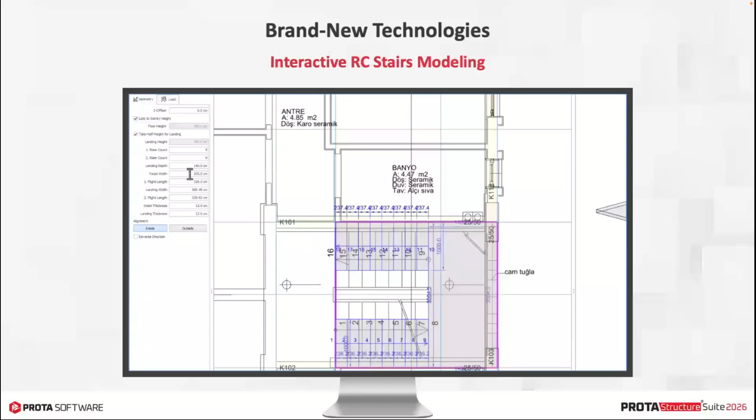And actually, what's really cool about it is how it lets you interactively model reinforced concrete stairs. We are talking about really a smooth integration here, and it will directly integrate into your building model. We even included a whole library of frequently used stair types to make things super easy for you.

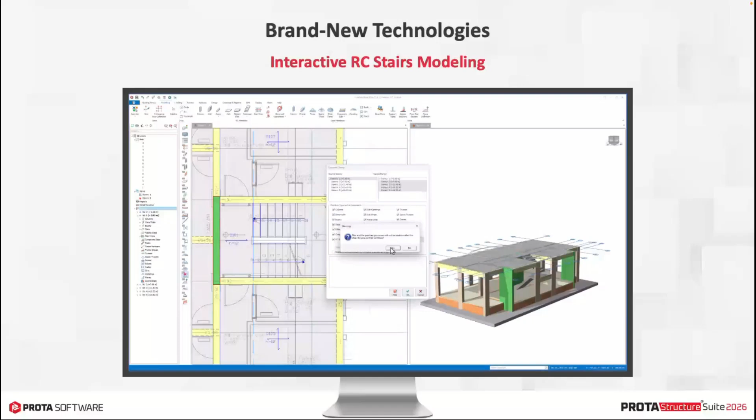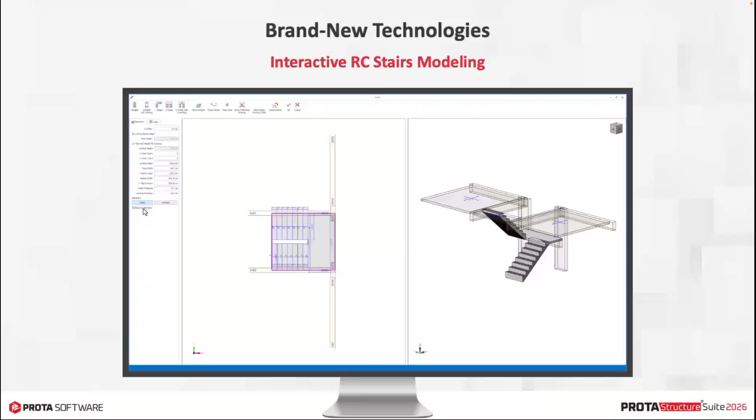Now, when it comes to loads, you can simply apply uniform area loads on the stairs, in any load case you need. And also, the stair module supports 3D reinforcements. You can visualize them, and all detailed drawings are based on 3D reinforcements.

And here's the magic part you see on the screen. The stairs are automatically integrated with your analysis model. They come with a compatible mesh and all the right boundary conditions already set up. So it's pretty much ready to go.

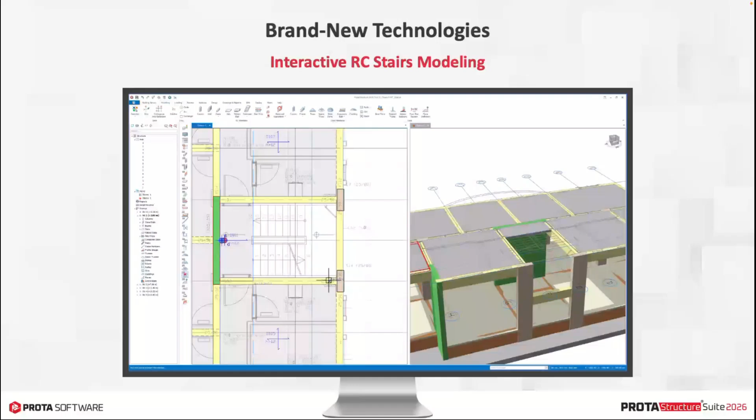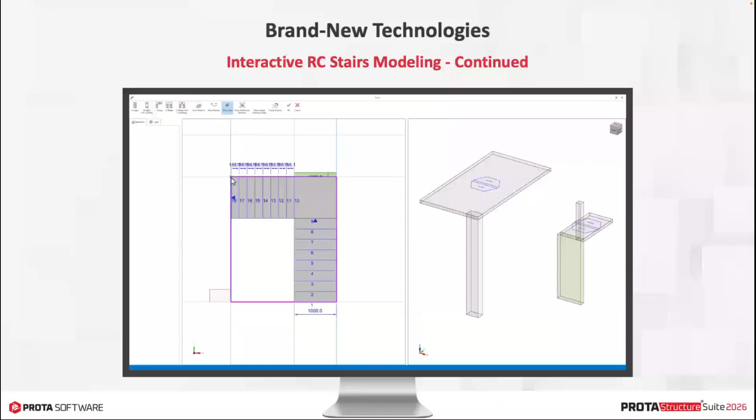And here you see an L-type stair practically modeled. The area is specified by picking consecutive points on the screen. And as an alternative method, the straight stair type is inserted in an area enclosed by axis boundaries. And to connect the slabs, you can apply an offset value. It doesn't have to go from one story level to another.

And that's all. You can fine-tune the placement. You can even use the measure command and measure the height of the stairs, treads, etc. It's very flexible. And another type you see here, the U-shaped stair with two intermediate landings. So all you have to do is pick the points and insert the staircase on the core wall.

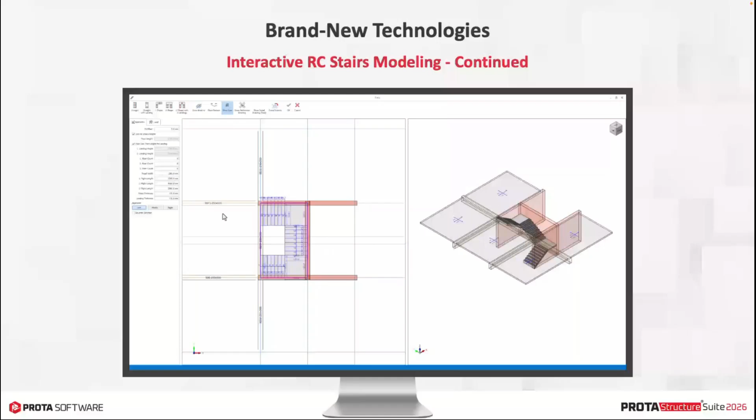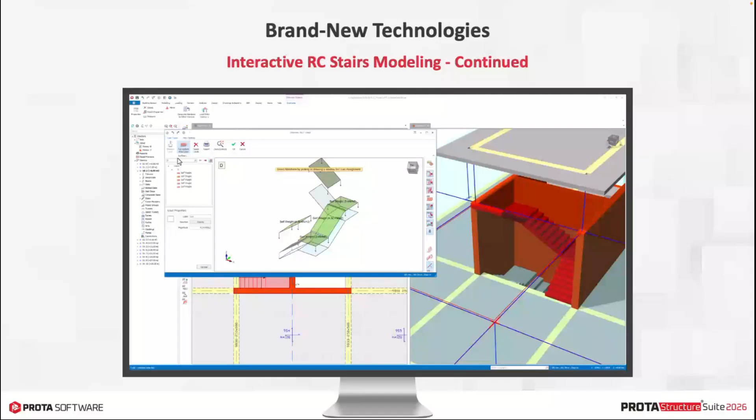And as usual, you can apply the loading on the staircase using the load editor. On top of the self-weight, the additional load, you can insert as many loads as possible. And when you check the analysis model, you can see that the staircase is compatibly meshed with the core wall. That will help you reflect the staircase boundary conditions realistically to the design.

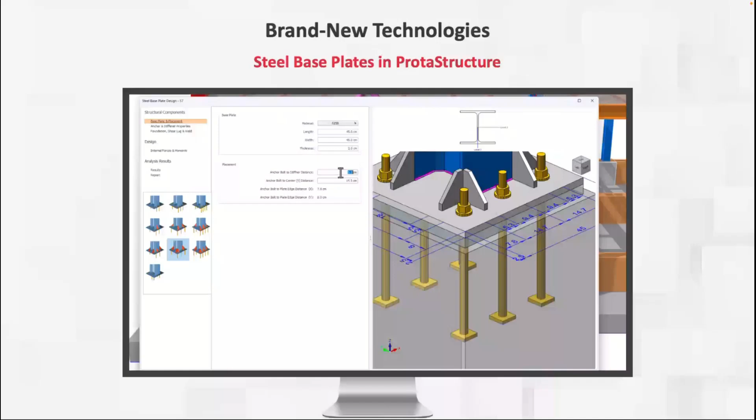And next up, we have been hard at work developing a comprehensive parametric macro specifically for inserting base plates under steel columns. And the best part is you can visualize them instantly in both plan and 3D views. It's pretty cool to see them just pop up into the right place.

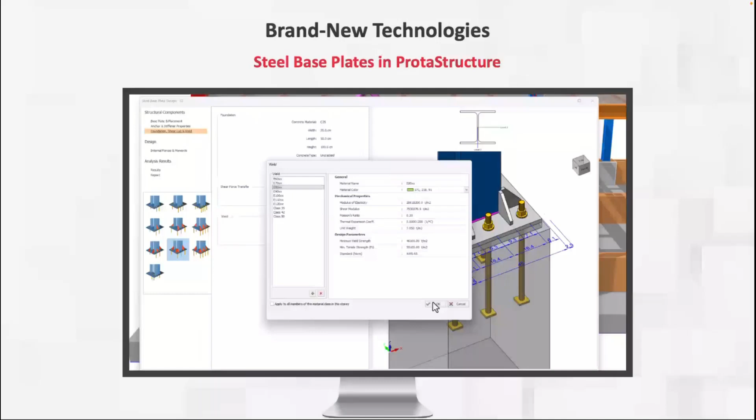Now, we already have some great base plate features in ProtaSteel. We already have a base plate macro, but with ProtaStructure 2026, we are taking it to the next level. We are introducing a brand new base plate modeling and design macro that's completely integrated with ProtaStructure itself. This isn't just an add-on; it's built into the software.

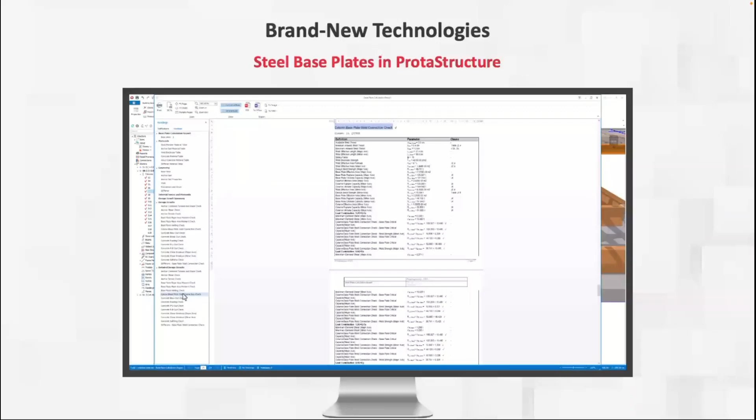And it fully supports the design codes following ACI 318, AISC design guides, Eurocodes, and Turkish codes. And that also includes the anchorage design in the base plates as well.

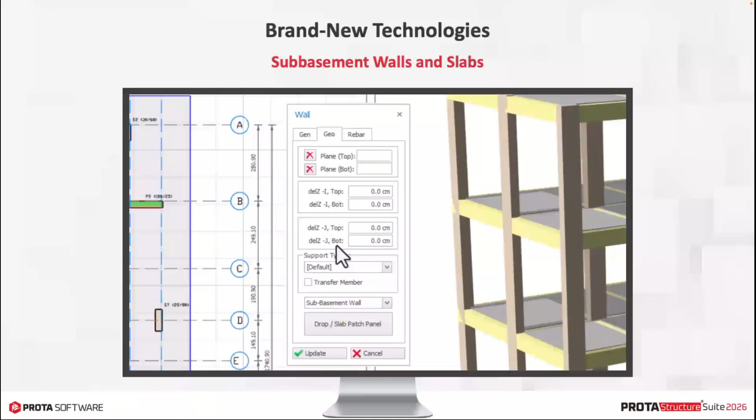And moving on, when we talk about sub-basement walls, these are typically a crucial part of the foundation. They do double duty. They support the infill on the ground story while also containing the fill within the foundation itself. In the past, sub-basement wall modeling could be a bit cumbersome in ProtaStructure, often requiring workarounds like adding extra stories or using deep beams.

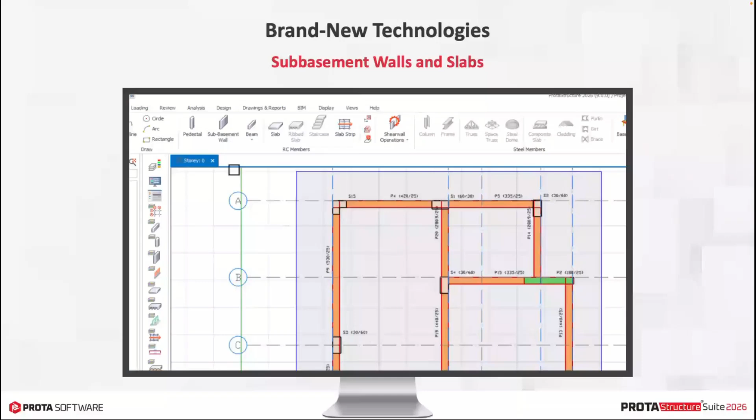But with ProtaStructure 2026, we made this significantly easier. You can now model these directly at the foundation level, first of all. Plus, you have the option to include them in your analysis, giving you more accurate and comprehensive results.

Similarly, sub-basement slabs are also considered as an integral part of the foundation system. These slabs are generally constructed right on top of the fill, which is of course contained by those sub-basement walls. These sub-basement slabs are typically reinforced with mesh reinforcements.

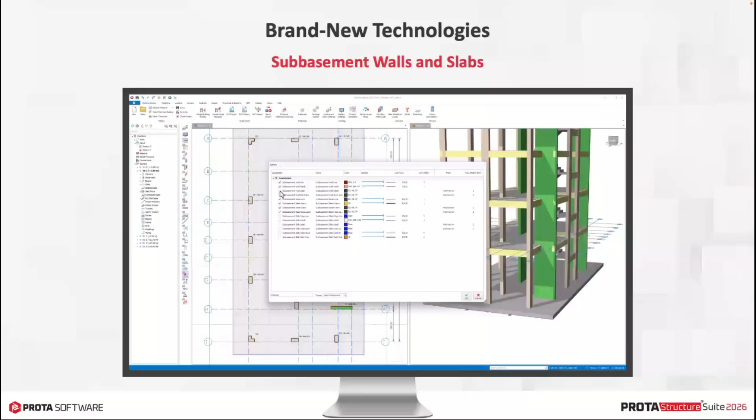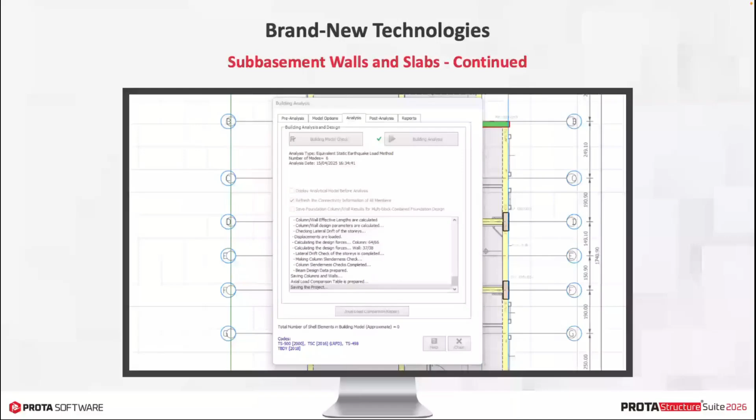Now the exciting news is that ProtaStructure 2026 enables you to model these slabs as a direct part of the foundation system as well. Not only that, but they'll also be meshed compatibly with the neighboring members, ensuring a smooth and accurate analysis. This is a significant leap forward, actually, as it was previously quite challenging to insert and mesh these slabs, especially when they were on the foundation at different elevations. Okay.

Let's shift our focus to another enhancement in ProtaStructure 2026, and it's a powerful new feature that really simplifies the design and analysis of concrete pedestals under steel columns. You can now seamlessly insert these pedestals, define their dimensions effortlessly, and integrate them into your structural models.

Now, here's the smart bit. When you already specified a base plate under your steel column, the base plate design macro will automatically detect the presence of that pedestal. That means you get accurate anchor design and everything stays consistent with your structural requirements. Plus, the column design itself helps you design the longitudinal and the horizontal reinforcement of the pedestals. And this provides you a much smoother workflow.

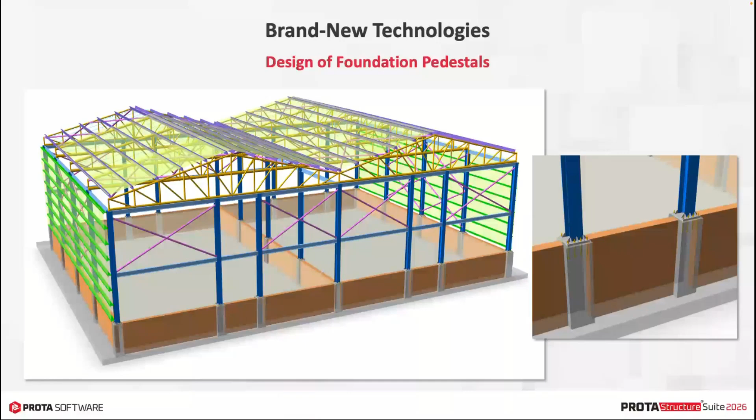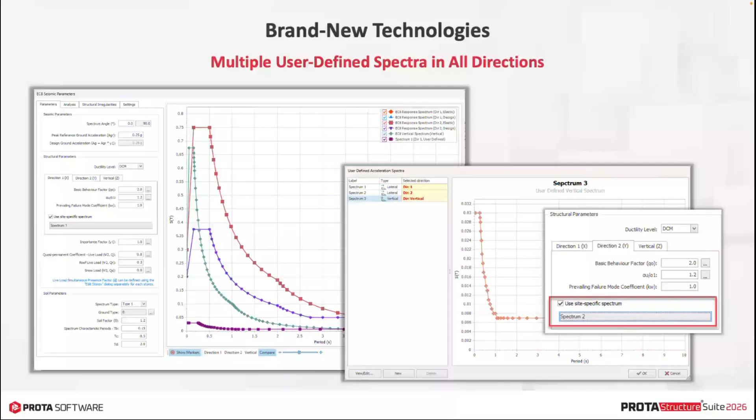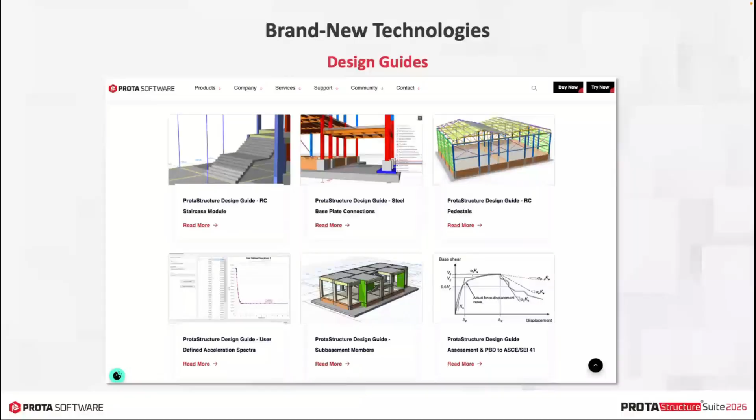Okay, and let's start talking about what we have in terms of code support and design. Let's start by talking about something very powerful that ProtaStructure offers here. That's a unique and robust workflow for the performance assessment and retrofit of buildings. This isn't just basic stuff, to be honest. It is backed by a whole suite of sophisticated analysis. We are talking nonlinear single-mode pushover, multi-mode pushover, and full nonlinear time history analysis. And the best part is it will come with a fully detailed member-by-member assessment report. So you get all the insights you need.

Now, what's really important here is that this entire arsenal of powerful features is now fully compatible with ASCE 41 and Eurocode 8 Part 3 procedures. So for American codes, we have ensured compatibility with key seismic hazard levels, such as BSE-2N, BSE-2E, BSE-1, and so on, different hazard levels with different return periods. And for Eurocodes, you can fine-tune the spectrum and use different assessment methods, such as Q-factor methods and other displacement-based methods. This means you are covered for a really wide range of project requirements and regional standards.

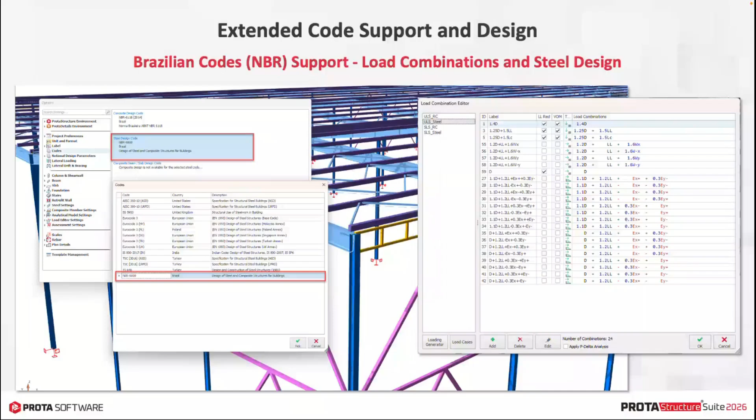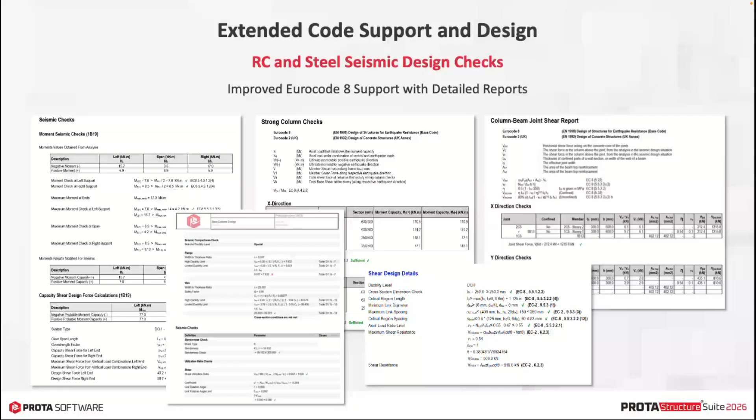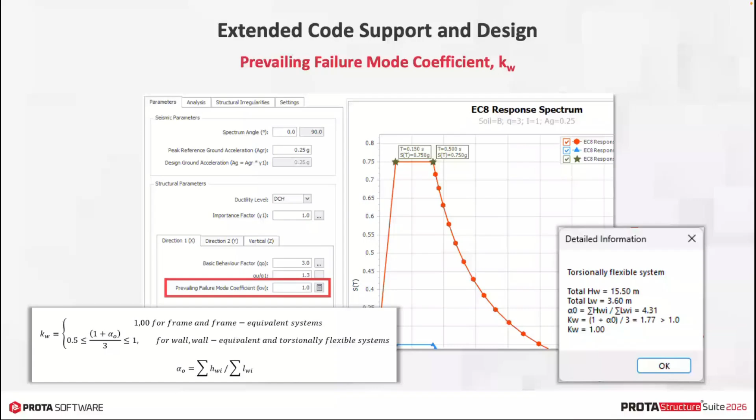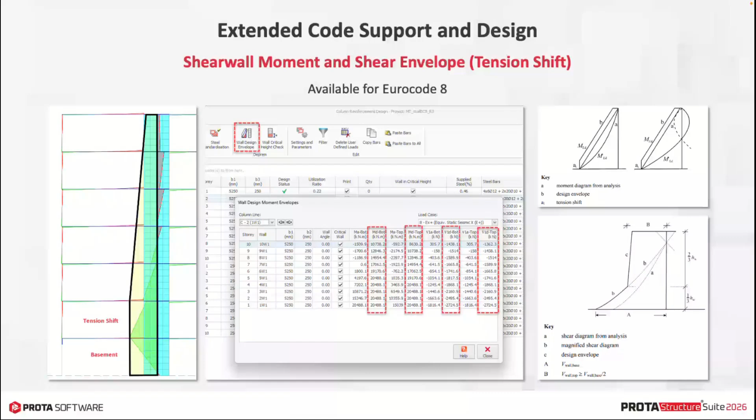Anyway, something else that we have substantially improved in this version is the vertical earthquake spectrum, elastic and design spectrum. This was in fact introduced in the earlier version, ProtaStructure 2025. You may ask, what's the improvement here then? So the improvement here is that you can now customize all the relevant parameters. In the previous version, the vertical spectrum, according to Eurocode, was automatically calculated, but you had limited ability to control it.

But now you can customize all the relevant parameters, things like vertical behavior factor, vertical acceleration, the soil factor, characteristic periods, and these are all independent from the horizontal spectrum. You can just customize it as you want. So this will allow you to adapt your design to the specific national requirements again, because different countries in Europe can adopt different vertical spectrum.

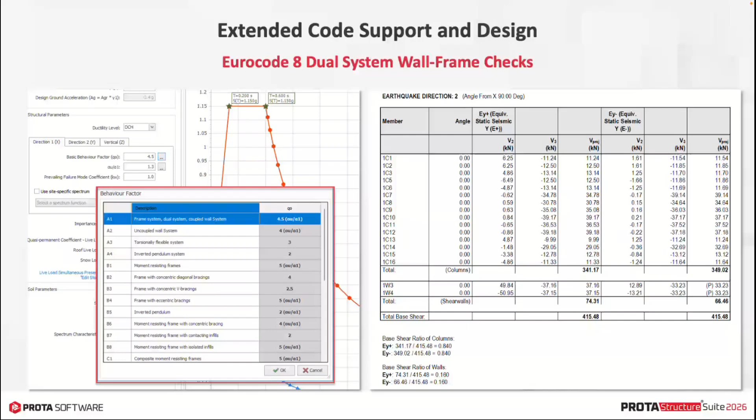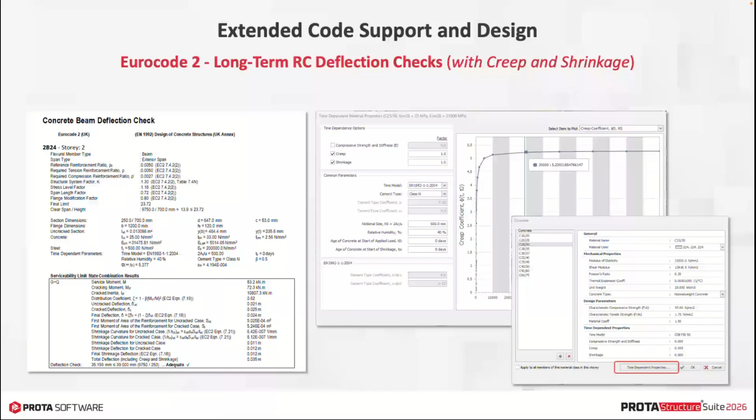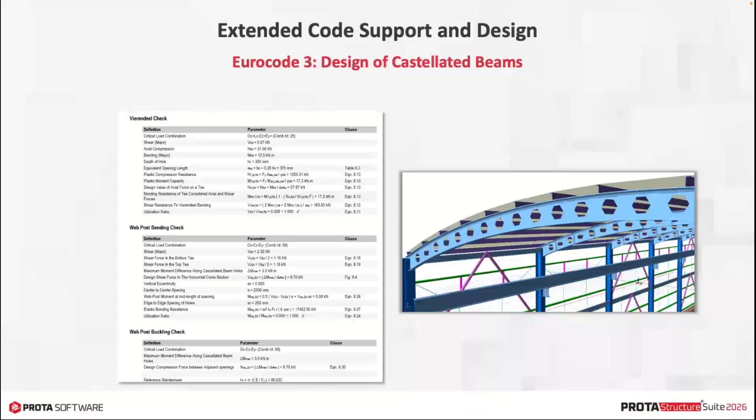Wow, it doesn't finish. Beyond just long-term deflection, we have also significantly expanded our crack width check capabilities. You can now perform these crack width checks according to a wide range of international guidelines, including Eurocodes, ACI, Indian codes, Colombian codes, Philippines, Peru, and Indonesia. This gives you much broader compliance and flexibility, of course.

And we have also added a specific new check that will be very beneficial for our users working with Indian standards. Actually, this was already introduced for ACI code before, but with the new version, in Indian codes clause 34.4, it verifies the load transfer from loaded column to the footing. This can be considered crucial for ensuring the integrity of the foundation. Okay, specific check.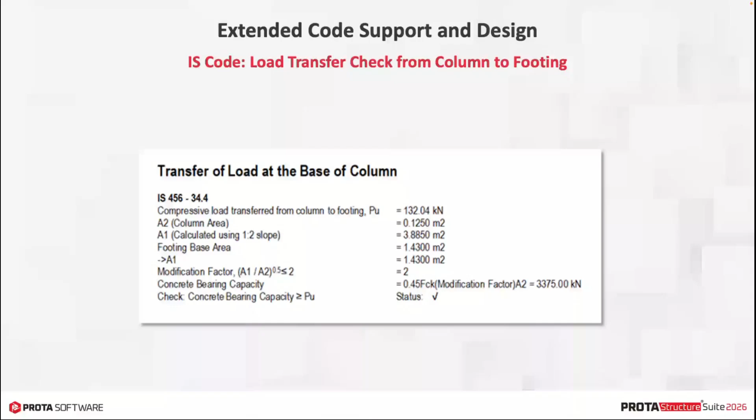Let's also highlight important updates concerning foundation tie beams. These beams, as you know, can be defined in ProtaStructure to provide a crucial horizontal connection between columns at the foundation level. They are, in fact, key for preventing lateral movement and relative displacement, especially when you are dealing with pad footing. And here is the news. With ProtaStructure 2026, you can now design these foundation tie beams according to ACI 318.

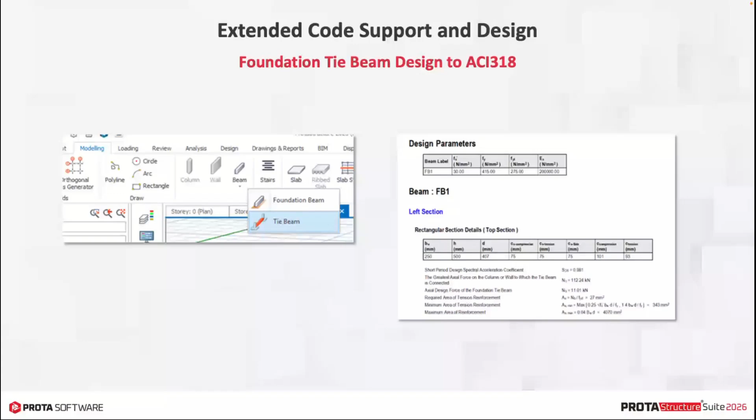Okay, and I'm approaching the end of my presentation. I will hand over to Altuğ, but what about the enhancements in analysis and analysis model creation? So let's start with punching shear checks. With the new version, you now have the ability to perform the punching checks directly using the finite element results, specifically leveraging the out-of-plane shear stress values.

What's really smart about this is that ProtaStructure will automatically collect the most critical shear stress values around the punching perimeters, and then it will compare this directly with the punching capacity. These checks are thoroughly done according to both ACI and Indian standards, ensuring comprehensive code compliance. By the way, we are not doing this for Eurocode and BS at the moment. Eurocode and BS are still using the analytical approach.

We have also added some important flexibility to help you strike that perfect balance between automation and control. So with the new version, we now support user-defined entries for accidental eccentricity and seismic overturning safety factors. This enhancement will directly empower you to tailor your design with greater precision to your local requirements, and it will give you an extra layer of control. All right.

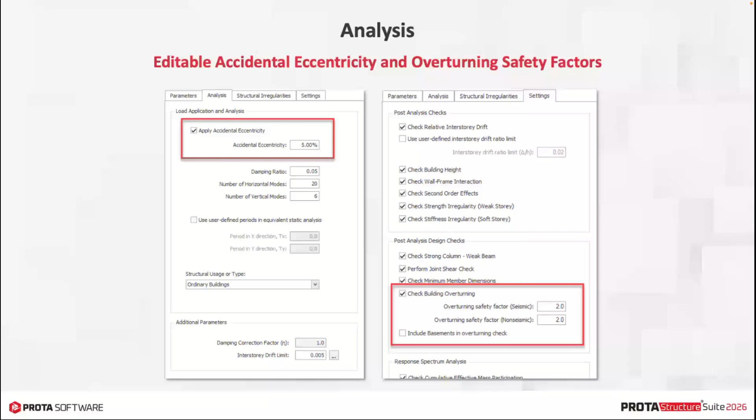Here is a really flexible new feature in ProtaStructure 2026. You can now designate any story as an intermediate story. So what's the importance of this? Intermediate stories can be quite diverse in practice. They could be partial installations between two main stories, perhaps specific structural members, or even internal setbacks used for various purposes in a building. If these elements are defined on what would typically be a standard story, ProtaStructure now allows you to explicitly designate that story as an intermediate story.

The key benefit here is that the intermediate story will be excluded from the irregularity check, which is often what you want for this type of level. Crucially, though, the system will still consider its full stiffness, mass, and load in the overall building analysis. They will not get lost, but you will get accurate results without unwanted irregularity flags. This, of course, provides you flexibility again while you are dealing with complex architectural and structural layouts.

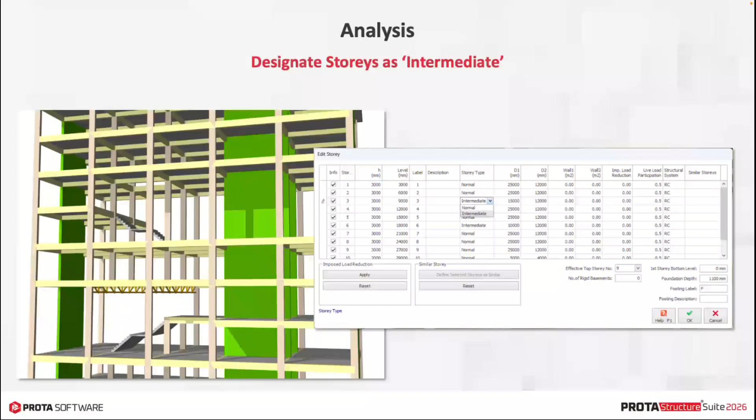Okay, and here is another really significant enhancement for your finite element analysis in ProtaStructure. You can now model and mesh multiple slabs positioned on top of each other within the same story. So this is a long sentence.

Okay, this improvement is genuinely about allowing you to address much more complex structural configurations. In earlier versions, only one slab in the same story was typically included in the mesh, which could limit the accuracy of your analysis for intricate designs. Now you have that full flexibility for complex architectural and structural layouts. You can model the slabs positioned on top of each other within the same story.

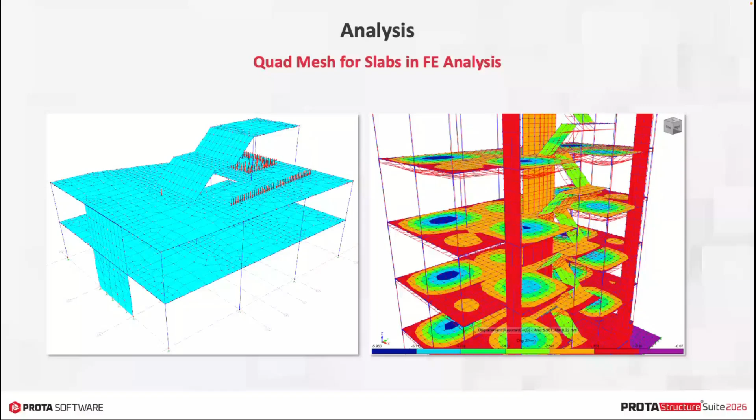And we've got another notable update to our meshing capabilities. We are now introducing quadrilateral shell elements for slabs. The great thing is that the mesh density for these is automatically adjusted by ProtaStructure, taking into account the minimum mesh size you specify. And from now on, the default shell element type in ProtaStructure will actually be the quad members. However, our smart meshing algorithm will automatically revert to triangular elements whenever the geometry of your structure truly demands it. In those cases, you will see a clever mix of triangular and quadrilateral elements used to ensure optimal meshing.

As you know, we are continuously improving our seismic analysis and design capabilities because there is no end to it. The engineer's requirement to design against seismic loads is quite challenging, and ProtaStructure does a very good job, in my opinion, and we are continually improving this in each version. So now we are bringing a new option: shear wall stiffness modifiers applied only in critical stories.

So as you know, ProtaStructure allows you to use cracked section properties for the seismic analysis. But specifically for the walls in this version, you can now allow ProtaStructure to use the cracked section properties only in the critical stories. That is a detailed but very effective option for seismic design.

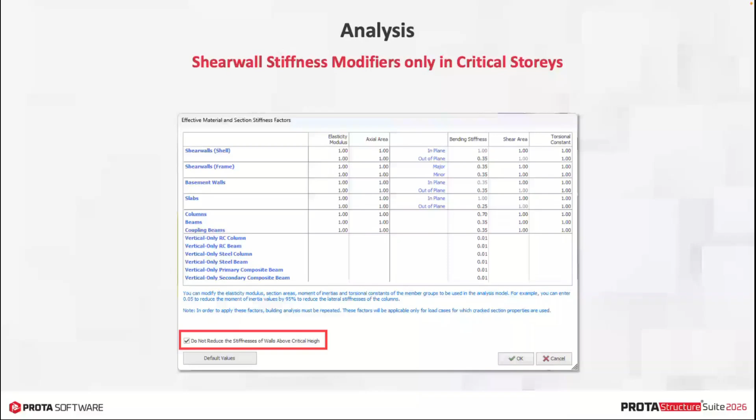We have taken another pretty significant step in the new version when it comes to load calculation and combination capabilities. We know ProtaStructure already supports the calculation of dynamic soil thrust and snow drift loads. However, in previous versions, you typically needed to manually create the user-defined load case and actually assign these specific loads.

With this latest version, the difference is ProtaStructure now can automatically generate the soil dynamic load cases and the snow drift load cases. And these load cases are seamlessly integrated in the combination group with the appropriate factors, and they are automatically included in the analysis. But we have to note that while the load cases are created automatically now, you will still need to manually assign the calculated loads to these automatically generated cases.

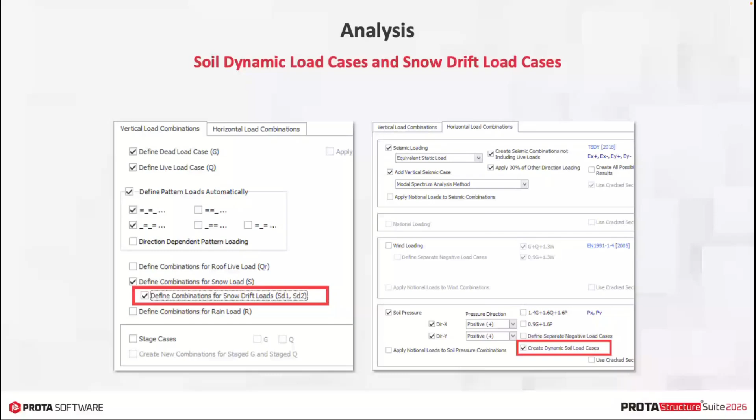All right, another significant refinement to our finite element modeling, particularly for flat slabs and raft foundations. ProtaStructure has a well-established feature that automatically crops the column outlines from the finite element slab mesh. This is super important because it leads to more realistic and economical designs by eliminating those unrealistic peak stress values that can occur when a column connects to a slab at just a single point.

And now in the new version, we introduced a brand new feature, automated body constraints. This enhancement automatically defines constraints between column joints and adjacent slab mesh points. What this does is it more accurately simulates the actual effects of the column section on the slab mesh.

The body constraints ensure that the joints on the top plane move truly as a rigid body, offering a much more precise mathematical simulation. This really addresses some of the relative rigidity limitations we saw in the past with the previous rigid link approach. And the final item on my list, Altuğ is looking at me.

We've also made small but very convenient improvements when working with ground motion records and accelerograms. As you know, ProtaStructure allows you to input any accelerogram manually, and traditionally these needed to be in gravitational acceleration units. However, we understand that the accelerograms that you download often come in different units, maybe meters per second squared or centimeters per second squared, or even feet per second squared instead of G.

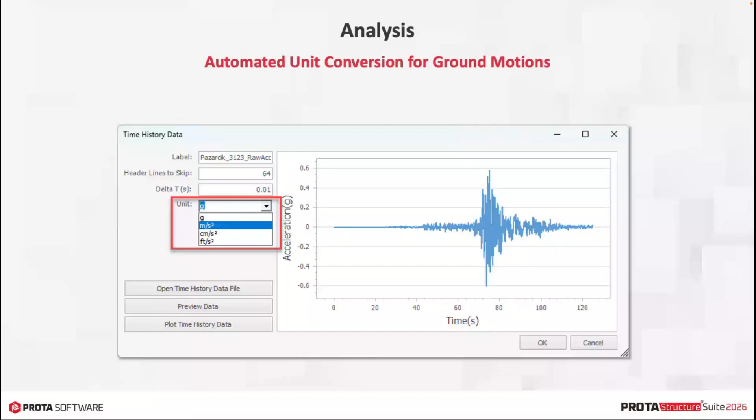Okay, wow. This was quite a journey. I know we've covered a lot of ground today, and honestly, the new features in ProtaStructure aren't even limited to what I have just presented here in 40 slides. There is even more to explore.

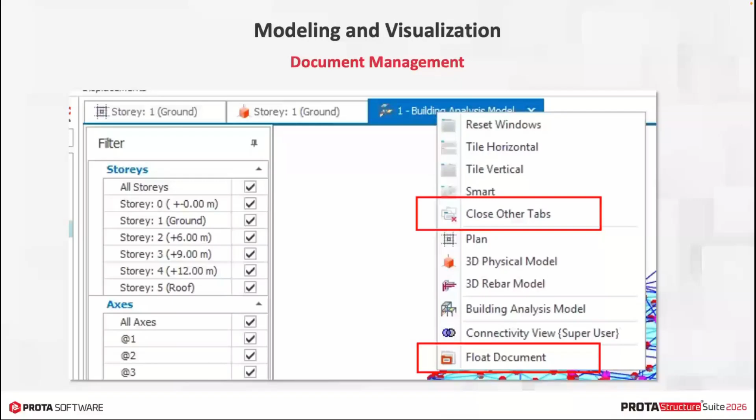We have introduced a master setting for rotation-prevented footings as well, so that you won't need to set this option for each pad footing separately. This is also available in the batch design user interface, so you can update the footings quickly.

Well, ProtaStructure 2026 introduces a transformative feature that elevates the load definition process. This is the ability to overlay architectural DXF drawings on the interactive load editor. With this enhancement, users can seamlessly reference architectural plans while defining loads, ensuring alignment with the design intent. Additionally, the capability to snap directly to points within the DXF drawing enables precise load placement, enhancing accuracy and reducing potential errors.

The DXF drawing is meticulously positioned at the exact coordinates specified in the main modeling screen. This ensures consistency and coherence between the structural model and the architectural layout. This feature streamlines the workflows and also leads to better precision and efficiency in load definitions.

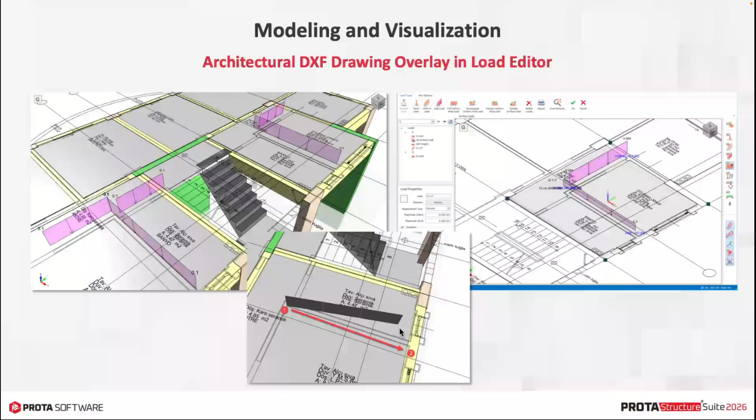ProtaStructure now features the ability to display support reactions with vector graphics under the supported members. This highly requested feature is now available, and it enhances the visualization and analysis capabilities for users.

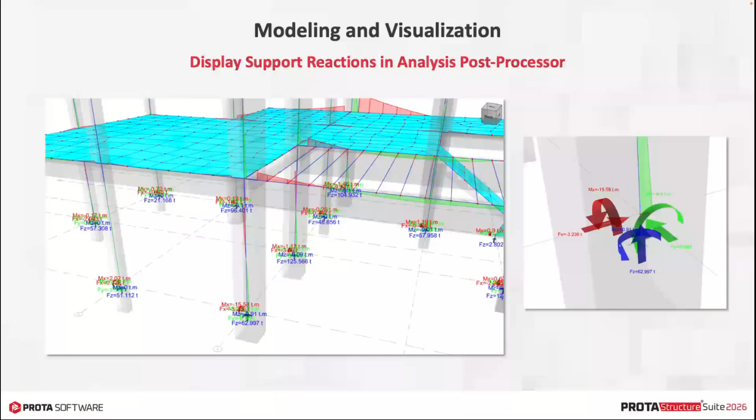Again, to improve clarity in contour presentation of shell stresses, displacements, and forces, we can now display the contour labels on the contour lines in Analysis Post-Processor. You can turn on the contour label display using the Contours Display Values on Lines option on the ribbon bar.

A new placement option for FE contours is also introduced in this version. The legend can be placed horizontally at the bottom of the screen to preserve more space and to provide better representation. The new placement can be adjusted using the position option under Contours ribbon page.

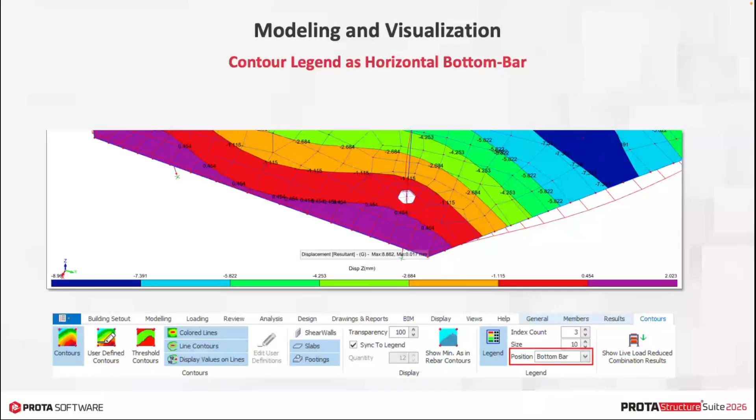With every new version, we strive to develop more efficiency and intuition into ProtaStructure. The frame members entity is now removed from the material library. Instead, the material system will make use of the frame member types to identify the default materials. In addition to this, default materials for welds, bolts, and plates are added for base plate design, obviously. Another enhancement in the material library is that rebar materials can now be set to a different material, even though the concrete material is still default.

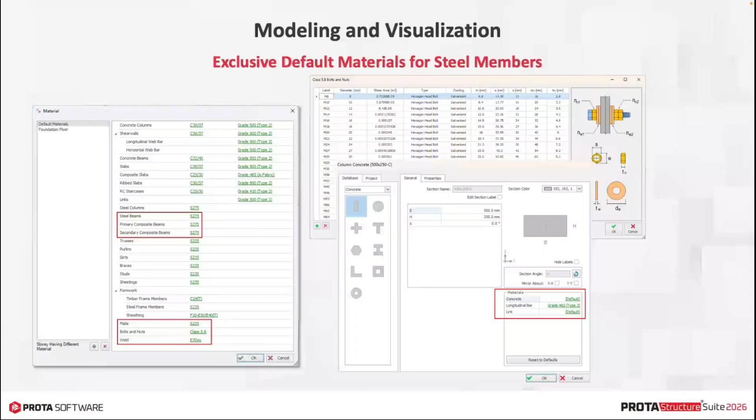Another update to the libraries is here. Ruukki metal deck types are now available in metal deck library when Poland template is selected. We have also extended the cold formed profile catalog. It now supports face-to-face and back-to-back C-shaped sections as well.

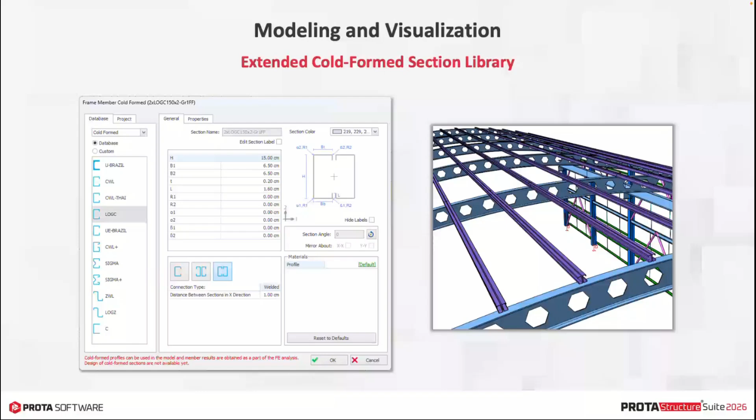Well, ProtaStructure is famous for interactive and automated design of reinforced concrete, steel, and composite members. That's composite metal decks. As a result of the design, each member will have governing design utilization ratios. ProtaStructure has a very powerful visual interrogation feature, as you know. You can color code the utilization ratios based on their severity levels. But previously, only steel members were color coded. With the latest version, reinforced concrete members are included as well.

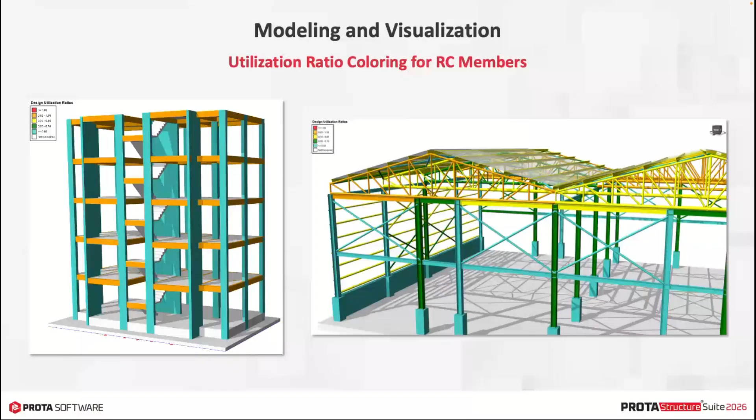We made it easier to manage the different loads in your designs. With our latest update, you can now assign unique colors to various load categories. This helps you quickly tell them apart. You can also color code individual loads for extra clarity. If a load is deleted or updated, its color will reset automatically to the default, which keeps your model consistent. This visual organization will help you work faster, help you reduce errors, and improve your overall design accuracy.

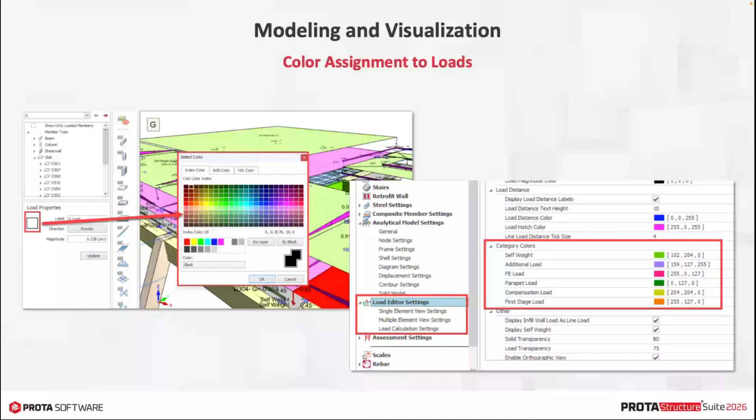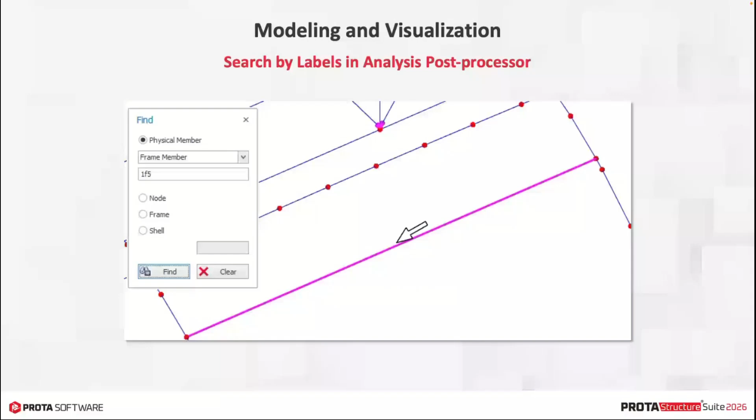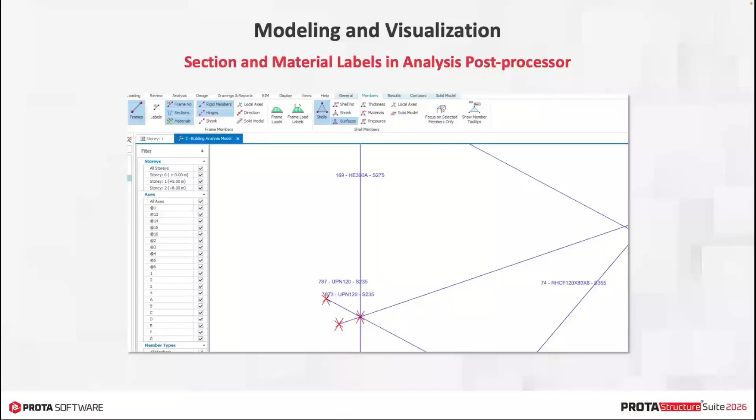Previously, the analytical post-processor used to display analytical material and section IDs, and this information had less practical use. We know this. And with this version, the labels are appended with physical material and section names for easier review. Let's continue with advanced BIM integration.

IFC4, as you know, Industry Foundation Classes version 4, plays a crucial role in the construction industry by enhancing data interoperability and standardization. It addresses many limitations of its predecessor, IFC2X3, as it supports more complex geometries like B-splines, spline surfaces, and curves. Curve support particularly improves the performance of models with curved elements. Overall, IFC4 promotes a more seamless exchange of information across different software platforms.

At Prota Software, we are dedicated to integrating the latest BIM support, as we always claim, including IFC4 into our solutions. Our commitment ensures that our users benefit from seamless information exchange, improved collaboration, and increased efficiency in their construction projects.

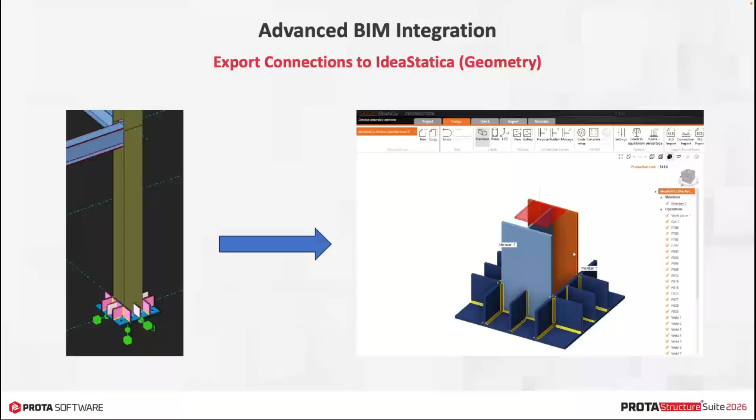As you know, we introduced the IDEA StatiCa Export feature in our previous version, which received great feedback from our users. So in this version, we have enhanced it further by allowing users to export the internal forces acting on the connections to IDEA StatiCa in a tabular format. We're going to talk about this later in the ProtaSteel section as well.

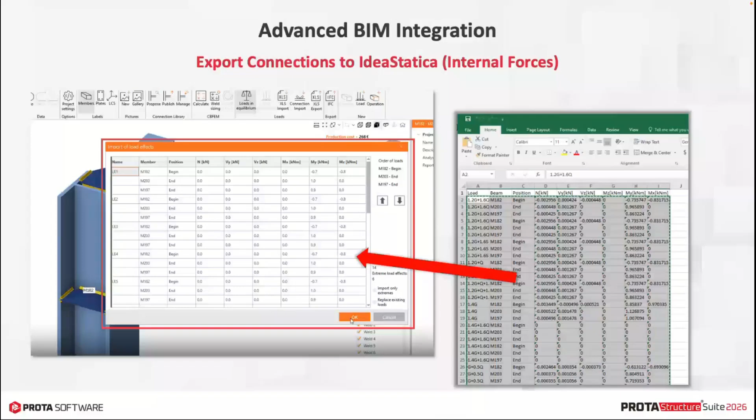ProtaStructure 2026 also introduces an improved analysis result filtering and post-processing feature. Now, analysis results of all modeling members, including macro members like domes, space trusses, composite slabs, frame groups, and even staircases, can be generated. You can even extract the maximum forces among combinations and obtain amplified results due to seismic analysis and results with live load reduction. This enhancement streamlines the workflow and allows more precise and targeted evaluations.

Please also note that this option filters the distinct results. If the maximum axial and shear results come from the same combination, then this combination is displayed only once, saving you time and space.

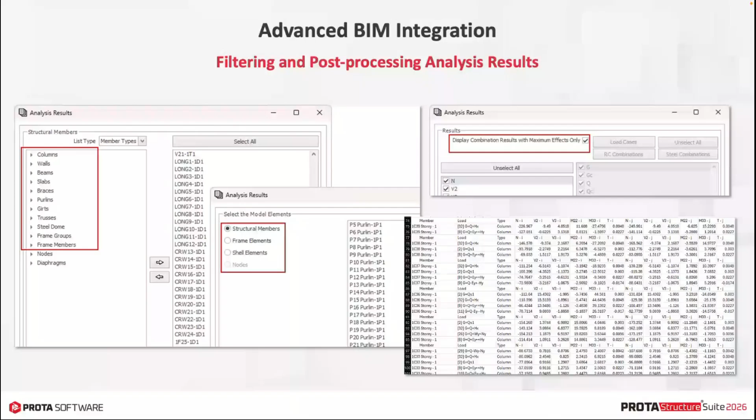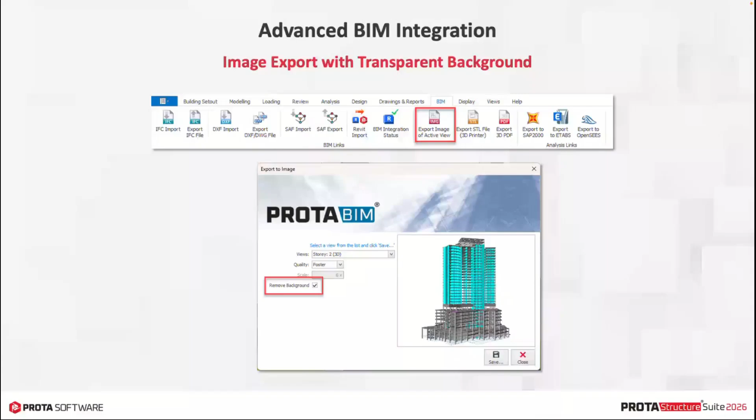If you need high-resolution images from your ProtaStructure model, a handy feature is the ability to export poster-quality images, thanks to the vector graphics engine of ProtaStructure. With the latest version, you can now automatically remove the background while exporting, so that you can make your graphics designers' life a lot easier now. So let's check out what's up with ProtaDetails.

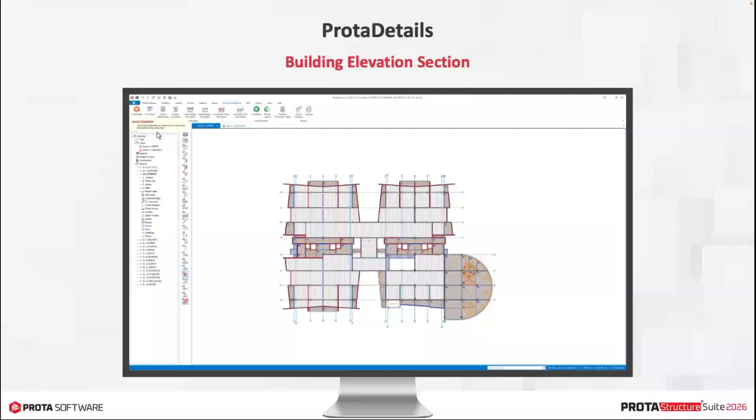With ProtaStructure 2026, sections can be generated from the entire building. This helps you better visualize your building model's section cut view in its entirety. It works similar to the good old section command in ProtaDetails. That is, you need to have a floor plan drawn on the canvas already, of course. This can be any story you pick. When you select the building section command and show the cut line, you will immediately get the entire building section.

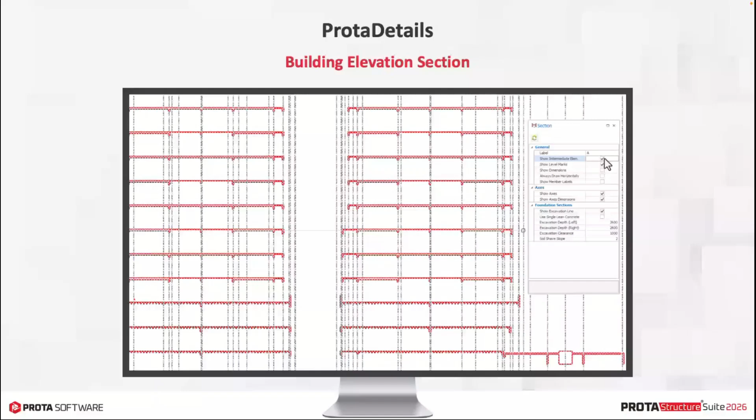The building section includes all the elements from slabs to reinforced concrete stairs. All the foundation elements are included as well. And you can even visualize the slab and beam infill loads as physical infill loads, wall objects with hatches and everything. And of course, all the rest of the settings work for building section as well.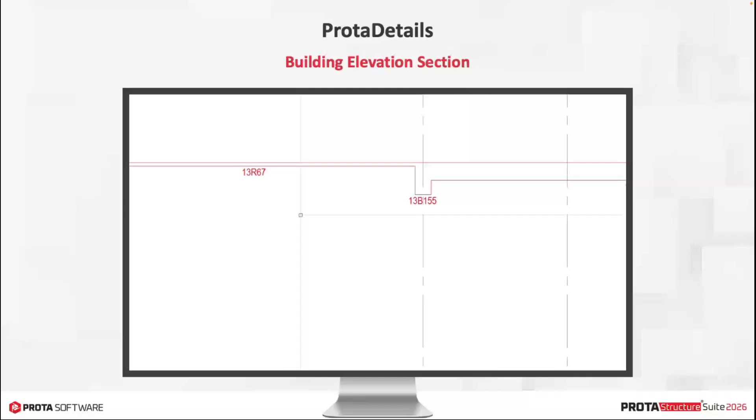Well, ProtaStructure already supports a symmetrical bent-up rebar pattern for slab detailing. In this new version, asymmetrical bent-up bars can be used in slabs. Additionally, a new straight bar pattern enables users to use top reinforcements in the span region. Foundation beams, rib beams, and slab rebars are now neatly presented in a tabular format as well, similar to story beams. This makes it easy to review the design and selected reinforcement information at a glance.

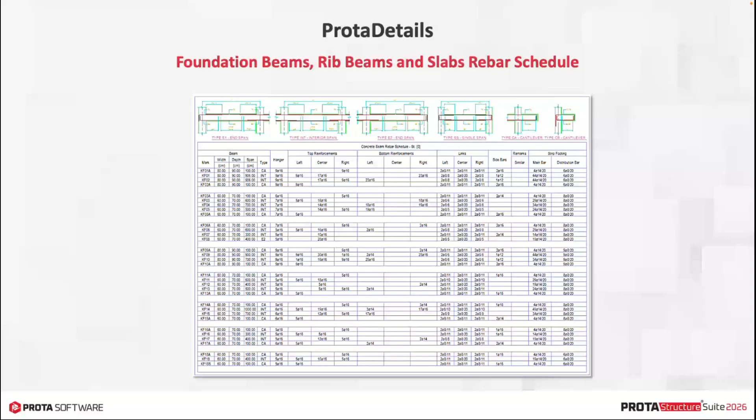Again, as Mustafa mentioned, we now have exclusive sub-basement wall support, and of course there is a reflection in ProtaDetails as well. You can generate sub-basement wall details using shear wall elevations and shear wall schedules or column application commands in ProtaDetails. Foundation story was added to these categories to draw the sub-basement wall details.

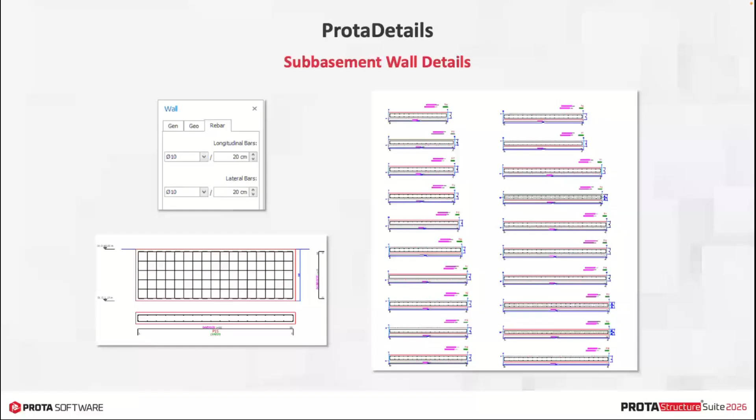Well, after you have designed pedestals in ProtaStructure, you can push them down to ProtaDetails for reinforced concrete detailing, just like other reinforced concrete members. You can use the column elevations and column application details for generating the pedestal details. The foundation story is added to these categories for this purpose. You can use ProtaSteel to obtain the anchor detail drawings of pedestals with steel base plates defined on top of them. And ProtaSteel enhancements, let's continue with them.

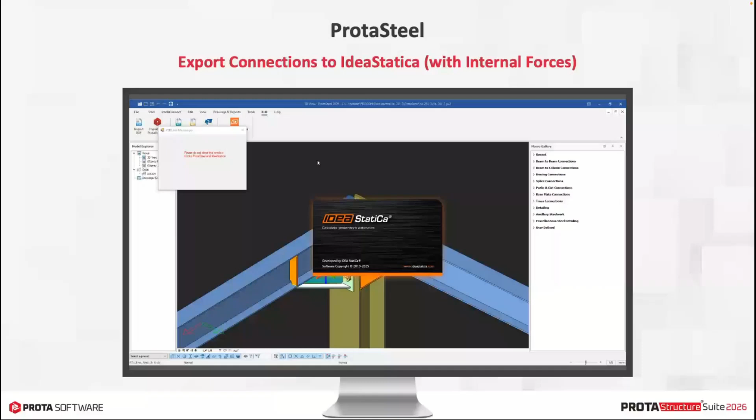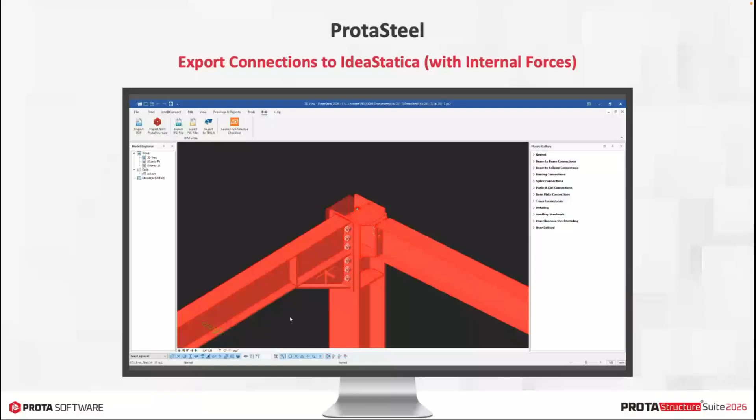Although ProtaSteel provides detailed design reports on mostly used connections, analyzing complicated or user-defined steel connections with component-based finite element analysis may be inevitable in your project. In Prota, we believe in open collaboration and create links between our products and industry-leading software. Our last addition was the IDEA StatiCa FEA links. You can export your automatic or user-defined connections to IDEA StatiCa and carry on if you need to. All you have to do is to initiate IDEA StatiCa Checkbot in ProtaSteel and select the primary members and connection components by following the instructions.

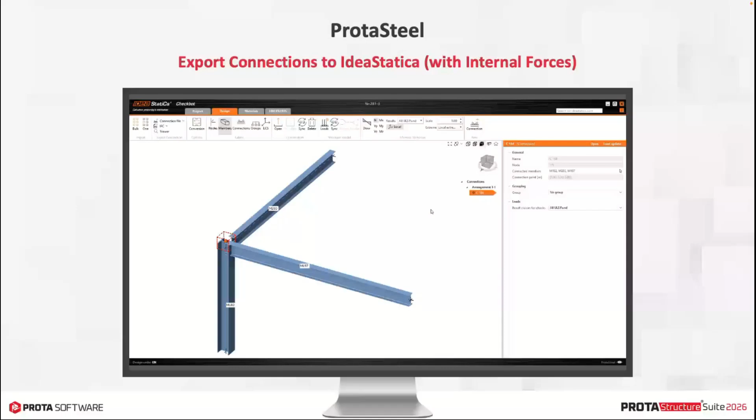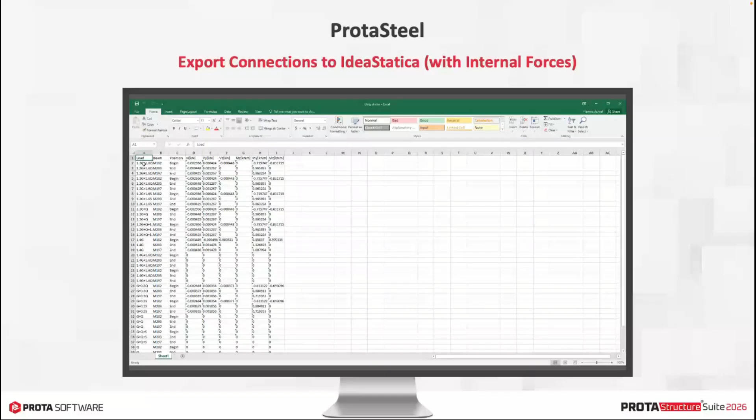In the previous version, we introduced this IDEA StatiCa export feature, which received great feedback from our users. And in this version, we have enhanced it further by allowing users to export the internal forces acting on the connections to IDEA StatiCa in a tabular format. An Excel file is automatically generated. The internal forces required for the connection FE analysis are listed here for each relevant load combination. And these internal forces are the post-process results according to the selected design and seismic codes, of course. Just simply copy them and paste them in IDEA StatiCa.

The connection of purlins on curved beams can now be easily made with the purlin connection macro. Purlin connection macro supports different connection types. IntelliConnect tools can also be used to create connections more quickly.

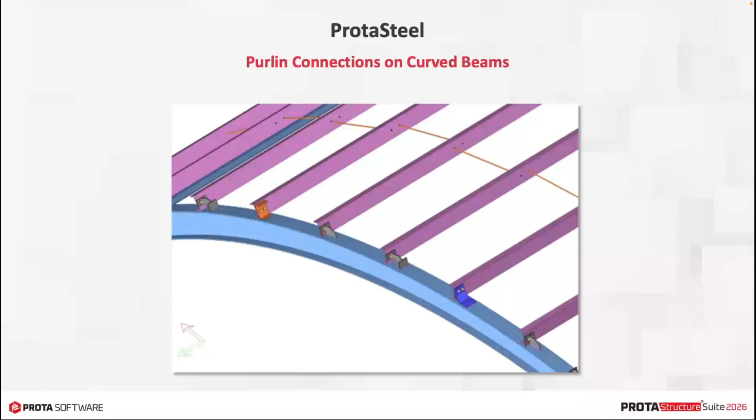The fin plate macro that is used to create beam to column and beam to beam hinged connections now supports main profiles made of hollow sections, which include square hollow sections and rectangular hollow sections.

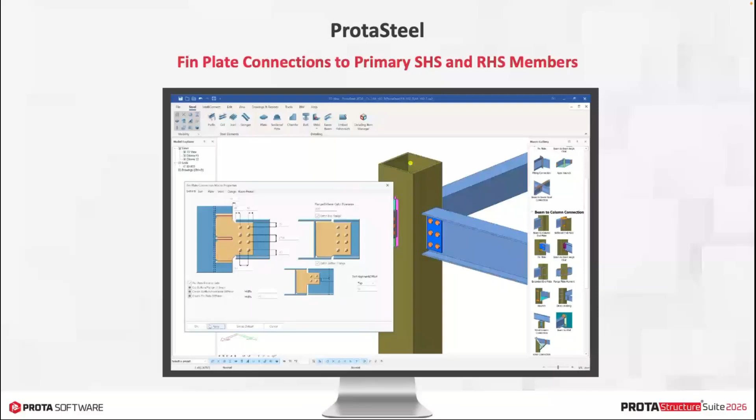Number of supported profile types are extended with this version. In ProtaSteel 2026, truss to truss and truss to column connections are supported by beam to beam and beam to column connections, such as beam to column end plate, stiffener end plate, fin plate, beam to beam angle cleat, beam to beam end plate. These connections can be applied on the strong and weak directions of the main members now.

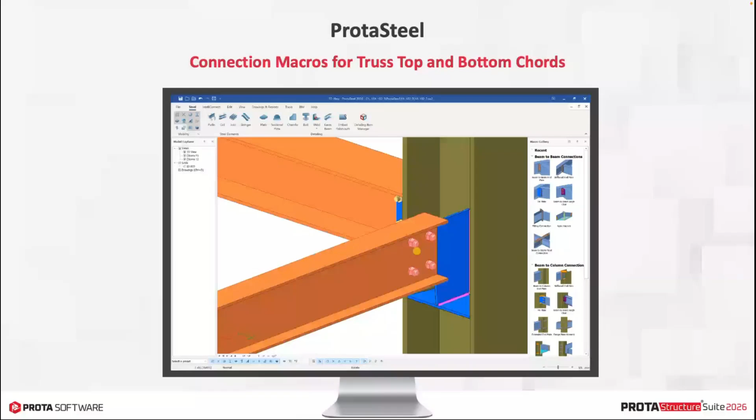Here we have a very useful enhancement again. You can now handle more cases with curved beams, including a wider range of approach angles and purlin connections with the curved members.

ProtaSteel V2026 comes with IFC4 support along with ProtaStructure 2026, as I have mentioned before. All the detailing objects and the entire model created in ProtaSteel can be exported in IFC file. Thus, you can be involved in project development processes with globally accepted IFC files.

And I think I have forgotten to mention the IFC-SG support. Maybe you have covered a little bit, Mustafa, but we need to stress that as well. There are some sections, so-called property sets, that are specifically designed for specific use cases. And with this version, we have provided these property sets that are required by Singapore. So we have a dedicated format called IFC-SG for our users who are creating projects and models for Singapore. So that's a big feature actually as well.

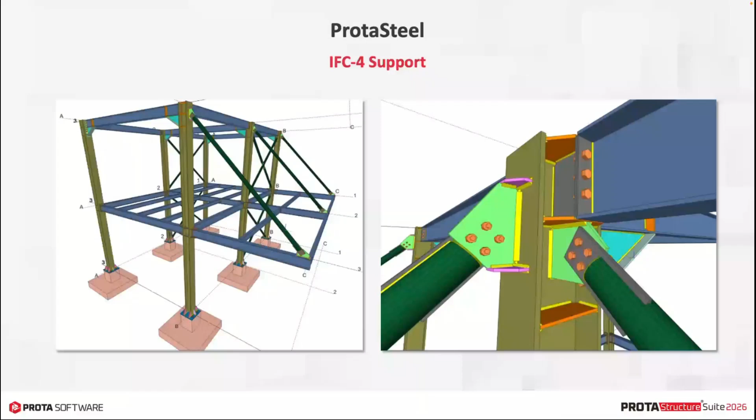So, thank you very much for your attention. We have covered a lot of content today. We know that this quick glimpse of the new features is not enough for you to process them. So we will be releasing videos and podcasts to help you dive deeper into them.

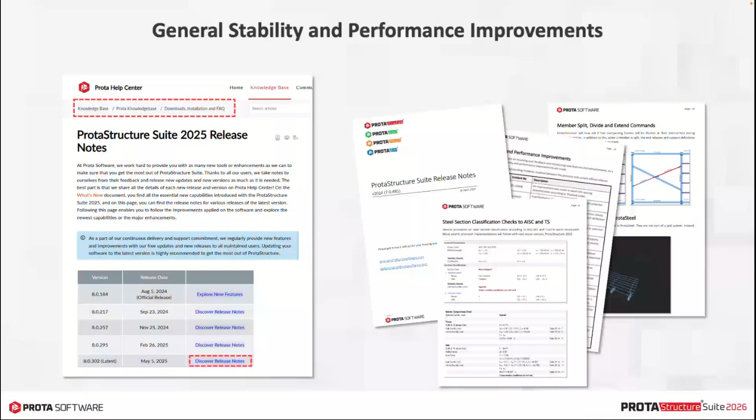Well, it's a special platform actually, because in Prota Help Center, we have a wide range of e-learning materials, a forum page reserved for only our licensed users where they can interact with each other or communicate with our team, and a ticketing system for our technical support team.